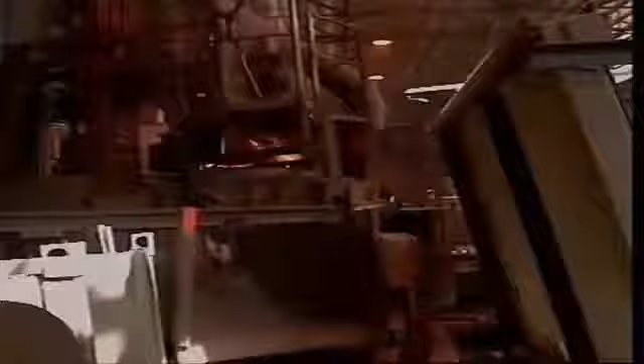An alloy is a combination of materials to make a substance that has properties different from the original materials. Aluminium by itself is too soft to stand up to the pressures a piston copes with, but if it is mixed with other materials, alloys are produced that are ideal as pistons.

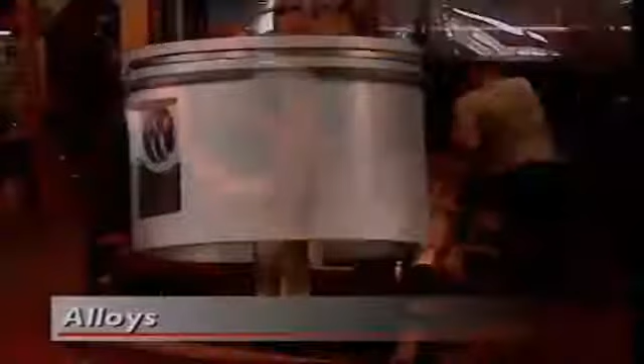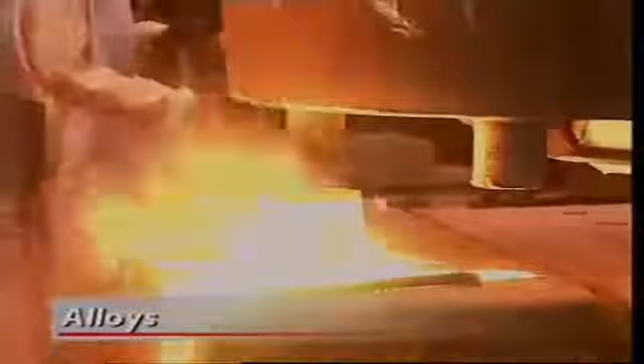In the same way, different steels can be made with a huge range of properties by changing levels of carbon in iron. Alloys can be designed with exactly the properties a particular part needs.

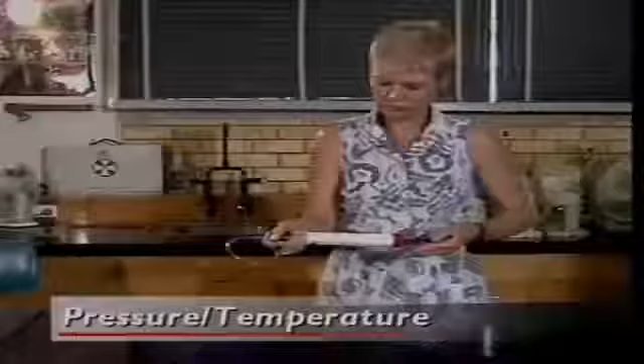The pressure and temperature of a gas are linked. As pressure goes up and down, so does temperature. This container has a fixed amount of gas. A plunger seals one end of the container. A pressure gauge is attached, and a thermometer.

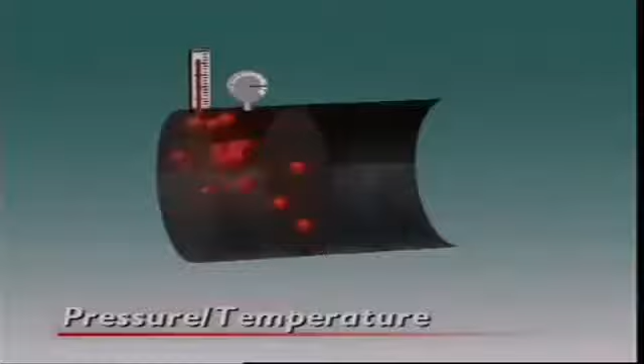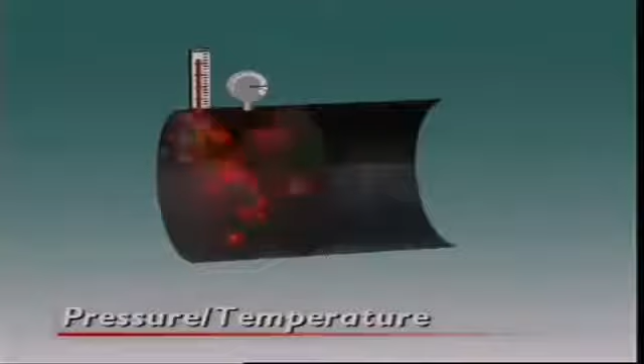Pushing in the plunger increases gas pressure. It forces the gas molecules into a smaller space. As a result, they move faster and make more impacts. This causes the gas to heat up, and the overall temperature of the gas rises too. An increase in pressure produces a rise in temperature.

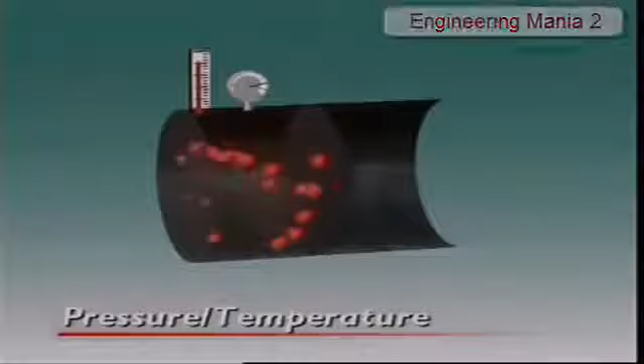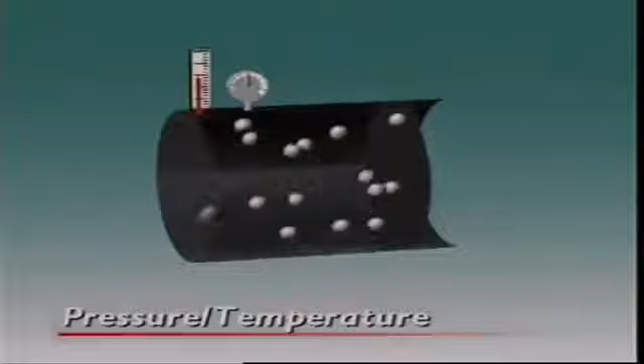Pulling out the plunger reduces gas pressure. It gives the molecules more room to move. They make fewer impacts. The energy level of the molecules falls, and so does the temperature of the gas. A fall in pressure produces a fall in temperature.

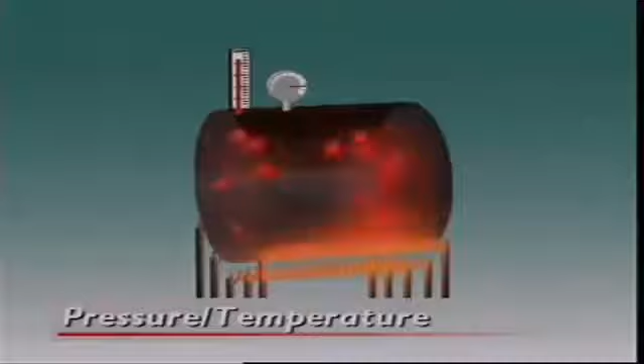Now let's see what happens when it is temperature that changes first. When a gas is heated up, its molecules gain energy and start to move more quickly. They make more impacts. This increases the pressure the gas is exerting. Increasing the gas temperature produces increased pressure.

Cooling has an opposite effect. The particles lose energy and slow down. They make fewer impacts. Pressure falls. So, for a fixed amount of gas, higher temperatures produce higher pressures, and lower temperatures produce lower pressures.

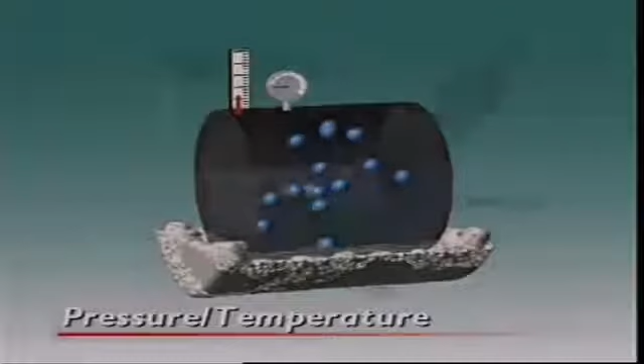This is put to use in compression ignition, or diesel, engines. Air in the combustion chamber is highly compressed by the piston. This causes such a large rise in air temperature that when fuel is sprayed into it, the mixture ignites.

The cylinder of this bicycle pump contains air. Its exit is sealed with a pressure gauge. As the plunger is pushed in, the air is forced into a smaller volume. At the same time, the pressure gauge shows an increase in pressure. It is this increase in pressure that allows the pump to do its work.

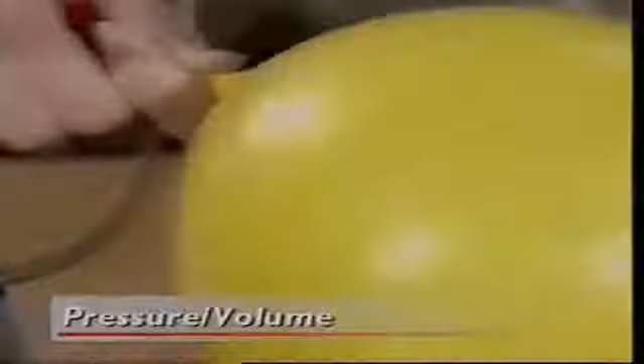When the plunger is pulled out, the volume occupied by the gas grows larger and the pressure drops. Larger volume, smaller pressure. Smaller volume, higher pressure. Pressure and volume are in what is called an inverse relation. As one rises, the other falls.

Reciprocating. Reciprocating means going back and forth over the same path. Using reciprocating action to make rotary action has many applications, large and small.

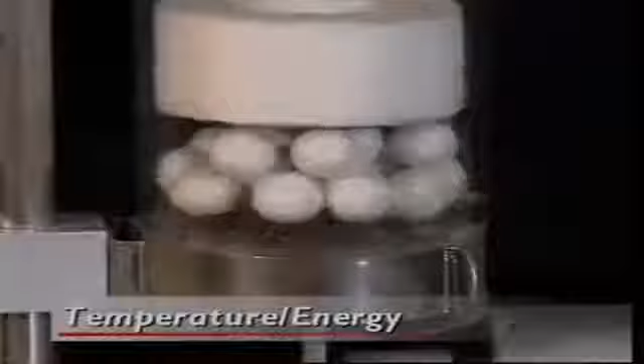The temperature of a gas is a measure of how much energy it has, and the more energy it has, the more work it can do. This is because heating gas particles makes them move faster, and they exert larger and larger pressure on the surfaces of their container. Higher pressure means the particles exert increased force, until eventually they are able to do work.

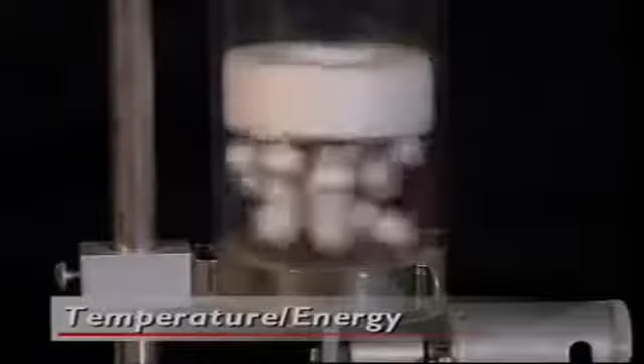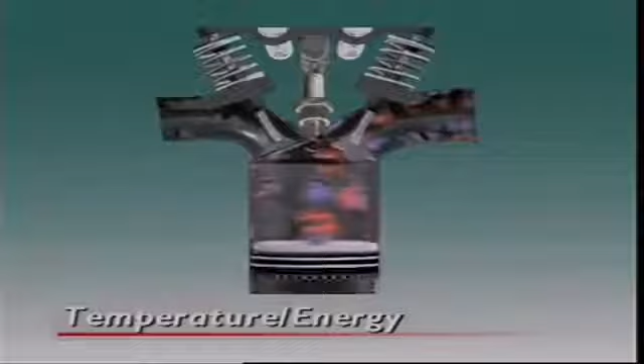This is especially true for the very high temperatures generated in combustion. The more energy the air-fuel mixture has, the more force it exerts on the piston and the more work the piston can do. That's what happens during the power stroke.

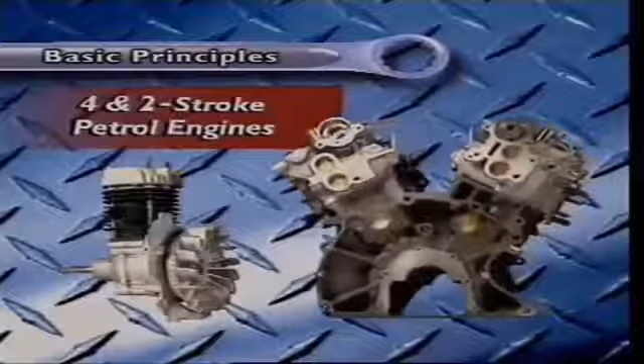Let's look at the basic principles of 4-stroke and 2-stroke petrol engines. This is a cylinder for a 4-stroke petrol engine.

The first step is to get the air-fuel mixture into the chamber. Mixture enters through an inlet port that is opened and closed by an inlet valve. This is called intake. Next is compression.

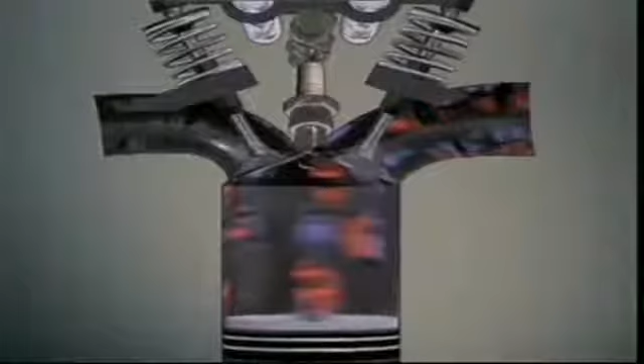The piston compresses the air-fuel mixture into a smaller volume. A spark across the electrodes of a spark plug ignites it and it burns. This burning is called combustion.

The burning gases expand rapidly and push the piston down the cylinder until it reaches bottom dead centre. The reciprocating action of the piston turns into the rotary motion of the crankshaft.

The crankshaft forces the piston back up the cylinder, pushing leftover gases out past an exhaust valve. And everything is back where it started, ready to repeat the whole process.

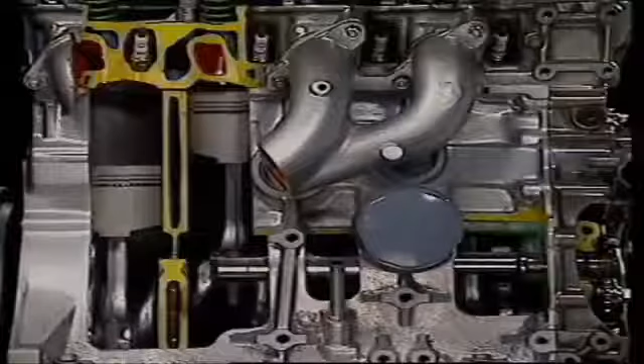The whole process is a cycle. A new mixture enters and is ignited. Combustion occurs, expanding gases drive the piston down and turn the crankshaft, which pushes the piston back up the cylinder.

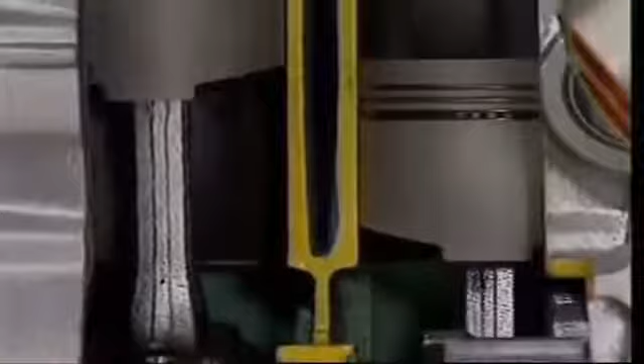These 5 events occur in all internal combustion engines. How they happen can change, but they are always there.

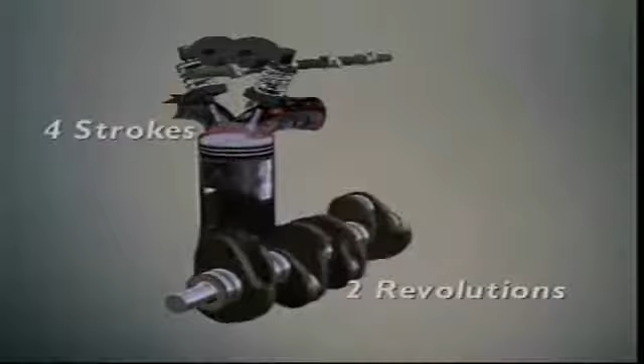In one 4-stroke cycle, the crankshaft does 2 revolutions. In those 2 revolutions, how many strokes does the piston make? It does 4 strokes. Out of those 4 strokes, how many actually produce energy? In one 4-stroke cycle, only 1 stroke out of 4 delivers new energy to turn the crankshaft.

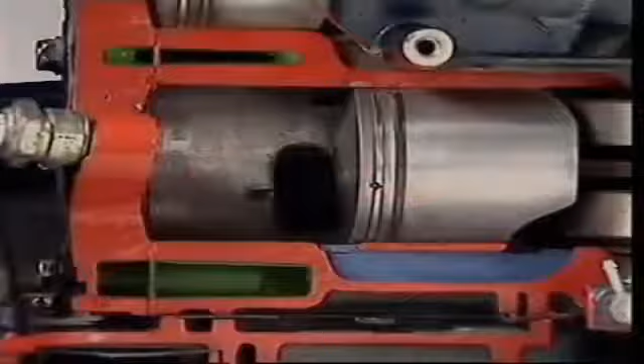Let's look at the principles of the 2-stroke petrol engine. The 2-stroke petrol engine is different from the 4-stroke petrol engine. In a 2-stroke engine, the inlet and exhaust ports are opened and closed by the movement of the piston. But it is still an internal combustion engine and has the 5 events common to all such engines.

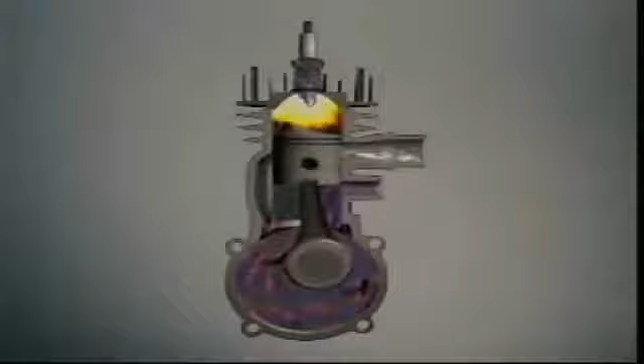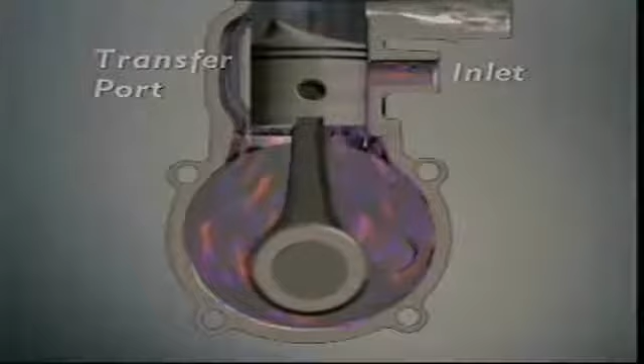Intake occurs when the air-fuel mixture enters the crankcase. It's then transferred from the crankcase to above the piston. Compression, forcing the mixture into a small volume. Ignition, when the spark from the spark plug ignites the mixture and it burns. Power, where energy released by combustion generates the force that turns the crankshaft. And exhaust, removing leftover gases.

As in all internal combustion engines, these 5 events must occur, but not always in the same way. The whole process is a cycle. A new mixture enters and is ignited. Combustion occurs. Expanding gases drive the piston down and turn the crankshaft, which pushes the piston back up the cylinder.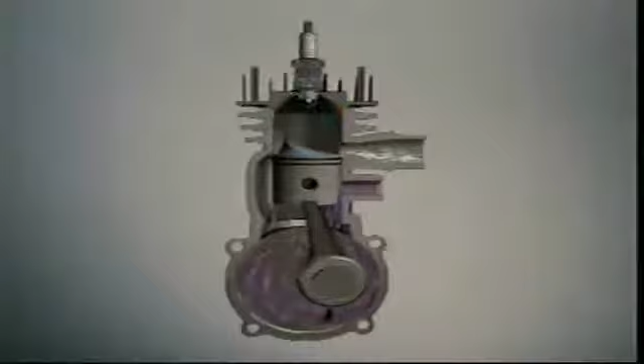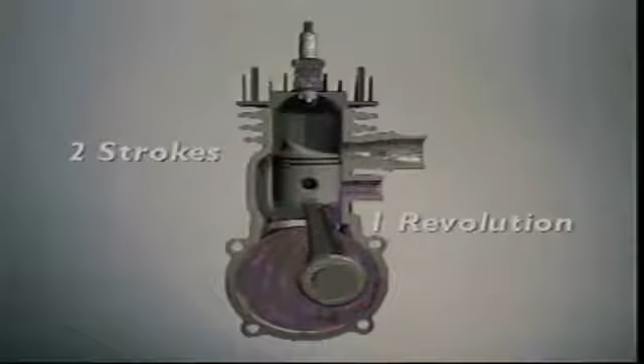In one 2-stroke cycle, the crankshaft does 1 revolution. In that 1 revolution, how many strokes does the piston do? 2 strokes. Out of those 2 strokes, how many actually produce power? In a 2-stroke cycle, only 1 stroke delivers energy to the crankshaft.

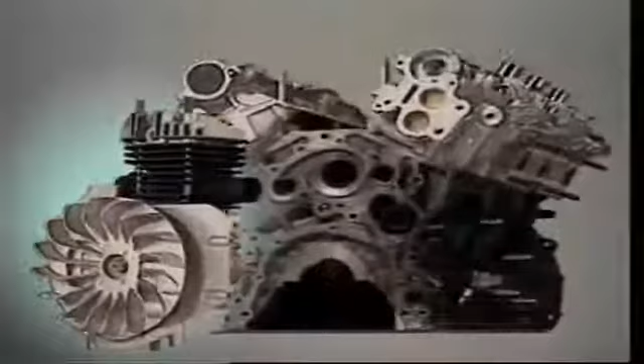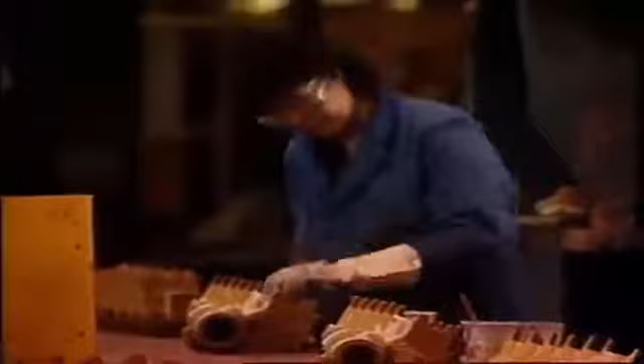This section looks at major components of the 4-stroke and 2-stroke petrol engine. Because they operate on similar principles, many of their components are similar too. For example, their engine blocks both operate under working conditions of very high pressures and temperatures. And new designs and materials to make them work more efficiently are always being tested.

Many vehicles still use cast iron, but some have aluminium alloy blocks. The main gain is a saving in weight. Aluminium alloys can be made as strong as cast iron, but they're lighter. This is also true for cylinder heads.

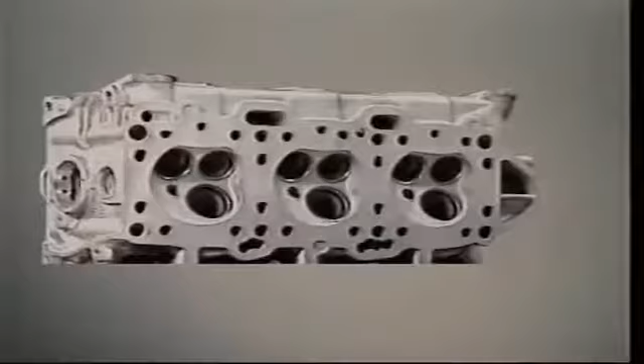Combustion chambers in the cylinder head come in many different designs. To help hold in the extreme heat and pressure of combustion, a seal is made between the block and cylinder head by a head gasket. The four-stroke petrol engine has other passages cast into the head to carry oil for lubrication and coolant for cooling.

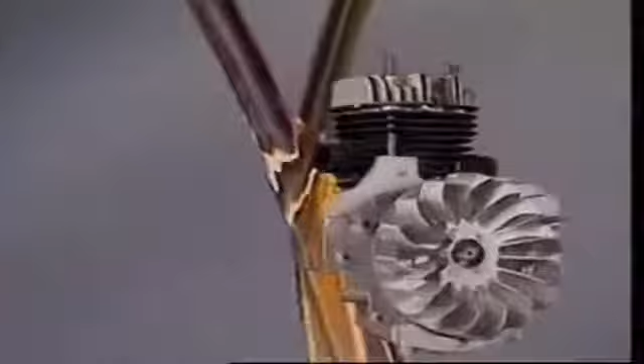In a two-stroke petrol engine, lubrication occurs by mixing oil with the petrol, so oil passages are not needed. And if, like many two-strokes, air cooling is used instead of liquid cooling, there's no need for coolant passages in the cylinder head.

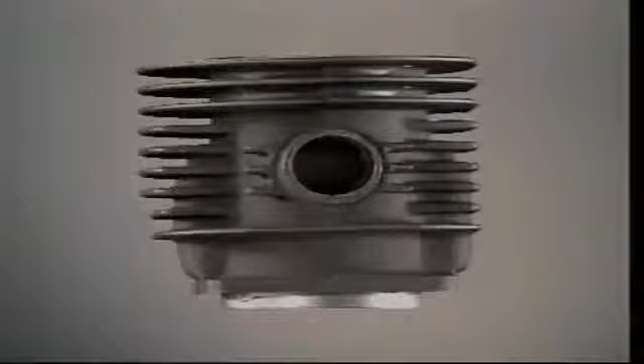Another difference between four-stroke and two-stroke petrol engines is how they deliver air-fuel mixture to the cylinder. In a two-stroke petrol engine, separate passages called ports let air-fuel mixture into the crankcase and cylinder and exhaust gases out. They're covered and uncovered by the piston as it moves up and down the cylinder.

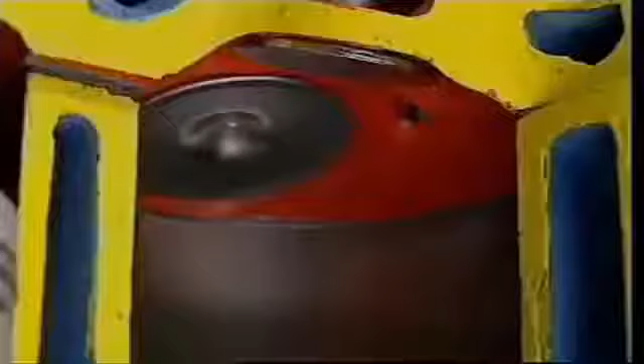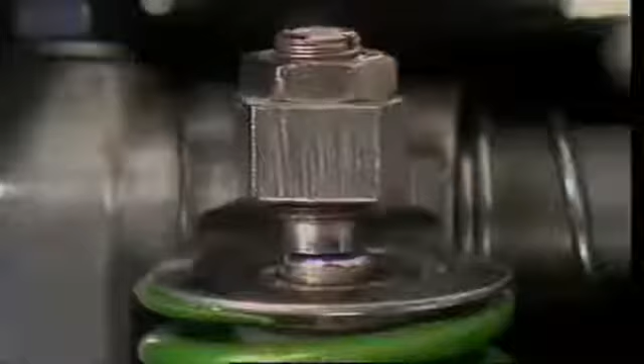In the four-stroke petrol engine, the inlet and exhaust ports are opened and closed by valves. These valves need a system to control how they work. The valve is held in place by a valve guide with a spring on its stem. A rocker arm is attached to a stationary shaft that allows the arm to pivot. The rocker arm compresses and releases the valve spring so that the valve opens and closes.

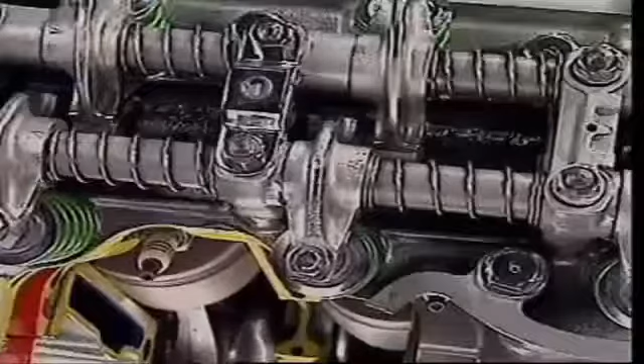The valves need a system to control how they work. This is done by using cams. A cam is a lobe on a shaft, specially shaped to open the valve, hold it open and let it close.

The cams control the valve action, but what drives the cams? Cams are attached to a camshaft. In modern vehicles, it's usually mounted over the cylinder head and is called an overhead camshaft.

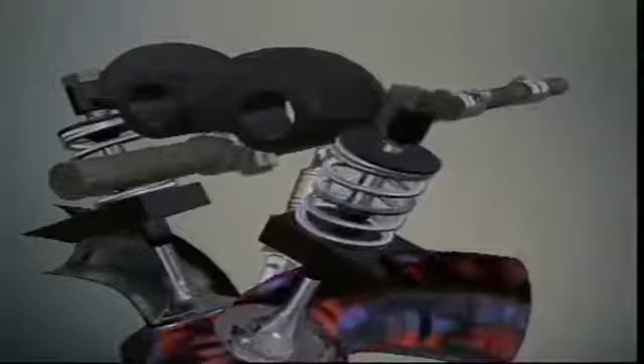Intake and exhaust lobes can be on the same shaft, or there can be a shaft each for intake and exhaust. Notice that in this design there's no need for rocker arms - it's a much simpler arrangement.

A camshaft can also be mounted in the engine block near the crankshaft. As the camshaft rotates, motion is transferred through the pushrod to the rocker arm. It pivots and opens the valve.

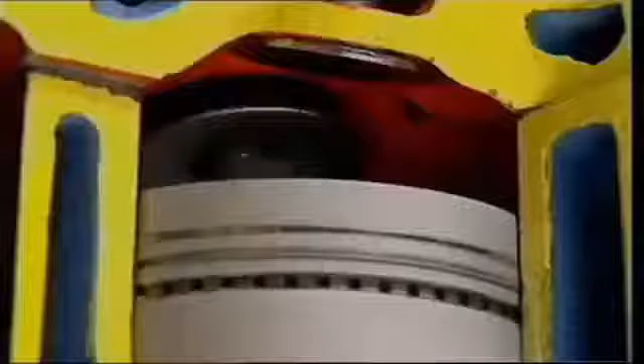The camshaft keeps all of the valves working in sequence, but all of this still must always happen at the right time. Air-fuel mixture must enter at the right time in the cycle, and the piston must be in the right place when the exhaust valve opens. The position of the piston is crucial, but what determines that?

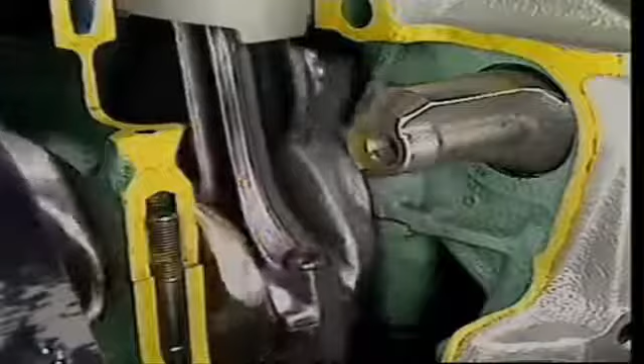The crankshaft helps to synchronize all this activity. In one cycle of a four-stroke engine, from intake through compression, ignition, power and exhaust, how many times does the crankshaft turn? Twice - it makes 2 revolutions.

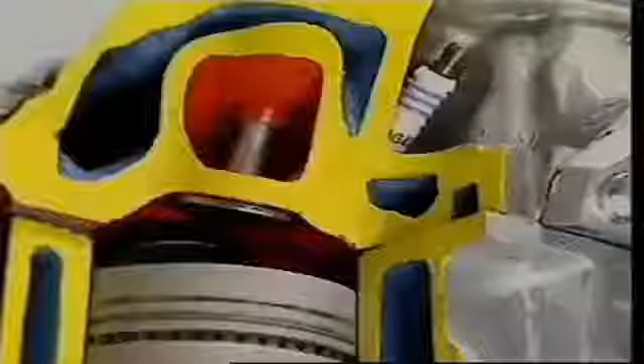During that time, what happens to the valves? They open and close once. So the cams must turn through just 1 revolution, as does the camshaft. In each cycle, the crankshaft turns twice and the camshaft only once, so the camshaft must turn at half the speed of the crankshaft.

One way to do this is with gears. One of these gears has 40 teeth and the other, the driving gear, has 20. When they mesh, the larger one rotates at half the speed of the smaller.

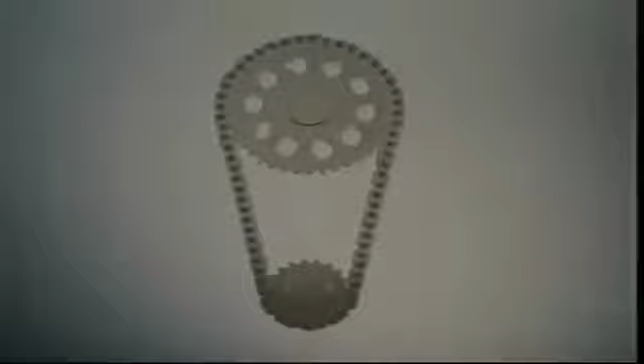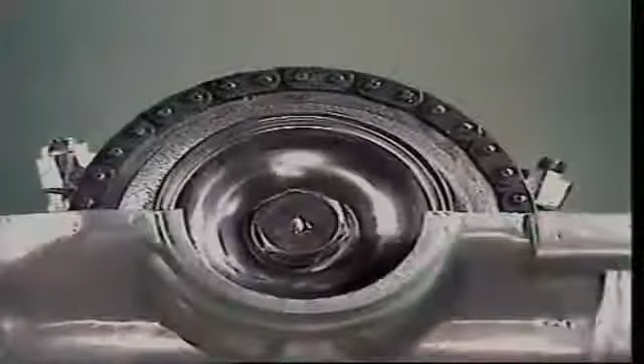If these gears are separated but linked with a chain, it makes them turn in the same direction, but they still turn at their same speeds. If the smaller gear is on the crankshaft and the other is on the camshaft, how fast does the camshaft turn compared with the crankshaft? Half the speed - just what the system needs.

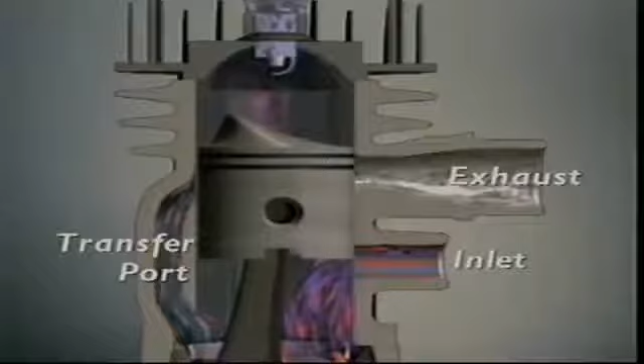The position of the ports is important for how mixture enters the cylinder and for how burned gases leave it. Removing exhaust gases is called scavenging. If they aren't fully removed, it reduces engine efficiency. Some engines use a deflector on the piston crown. It directs air-fuel mixture up towards the spark plug and exhaust gases down towards the exhaust port. This reduces the amount of incoming mixture escaping through the exhaust port and helps remove exhaust gases.

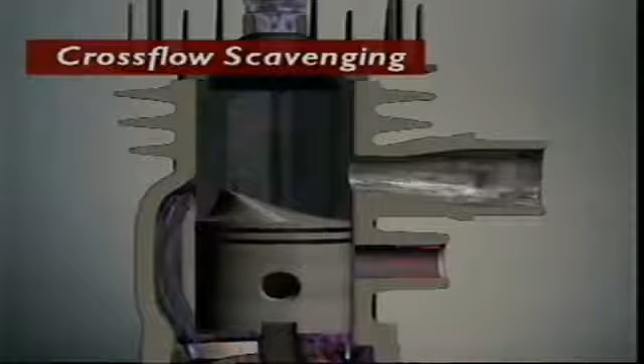How scavenging occurs depends on the design of the cylinder and ports. Crossflow scavenging occurs when mixture enters on one side of the cylinder and exhaust gases escape on the other side. No valves are used and mixture flows across the cylinder. Loop scavenging means mixture enters the cylinder across the top of the piston and is caused to flow upwards in a loop before moving in the direction of the exhaust port.

Let's look at the 4-stroke and 2-stroke petrol engine cycle. What is a stroke? It's the movement of the piston from top dead centre to bottom dead centre. Calling an engine 4-stroke means its engine cycle has 4 strokes. A 4-stroke petrol engine uses internal combustion, so those 4 strokes must include the 5 key events common to all internal combustion engines: intake, compression, ignition, power and exhaust.

Let's look at a simplified model. The intake stroke starts with the exhaust valve closed, the inlet valve opening and the piston at its highest point, top dead centre. It starts to move down, increasing the volume above the top of the piston. This makes pressure inside the cylinder lower than pressure outside. This higher outside air pressure forces air-fuel mixture into the cylinder. The piston reaches bottom dead centre, the inlet valve closes and the intake stroke ends.

Both valves stay closed as the piston leaves bottom dead centre. The piston moves up, squeezing the air-fuel mixture into a smaller and smaller volume, which compresses it. That makes its temperature rise, and that makes combustion easier.

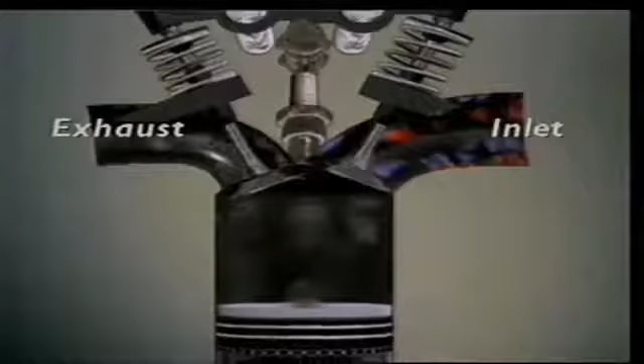Just before the piston reaches top dead centre, the next key event occurs: ignition. Burning, expanding gas generates the force to push down the piston. This is the power stroke that drives the engine. The piston now moves from bottom dead centre to top dead centre. The exhaust valve opens and the piston pushes out the leftover gases.

Let's look at the cycle operating. Intake takes in air-fuel mixture. Compression squeezes the air-fuel mixture into a smaller and smaller volume. Ignition: the mixture under pressure is burned. Power: burning, expanding gases push the piston down, creating a power stroke that turns the crankshaft. Exhaust: the piston moves upward, forcing burned gases from the chamber. All 5 events occur in this order in each of the engine cylinders.

Let's look at the cycle of the 2-stroke petrol engine. Calling an engine 2-stroke means its engine cycle has 2 strokes. As in a 4-stroke engine, a stroke is the distance from top dead centre to bottom dead centre.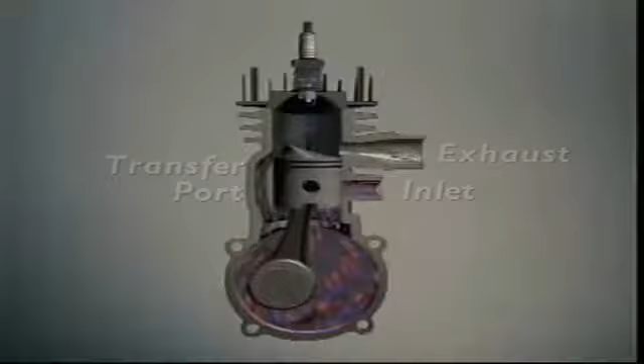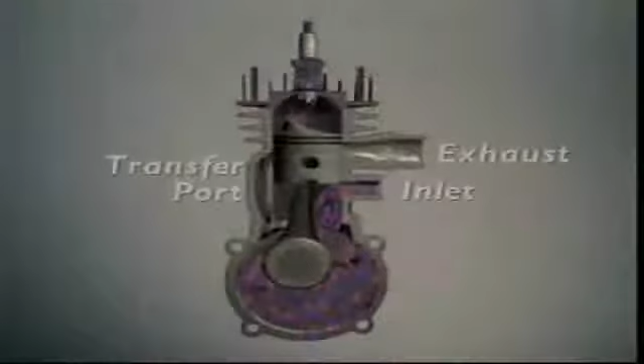The piston moves up the cylinder from its lowest point, bottom dead centre, compressing air-fuel mixture already in the combustion chamber. As it rises, the top of the piston covers the exhaust port and the transfer port. This is a third port or passage between crankcase and cylinder. The bottom of the piston uncovers the inlet port. At the same time, the rising piston is increasing the volume of the crankcase below the piston. Pressure in there falls until it's less than outside air pressure. This pressure difference forces more mixture into the crankcase.

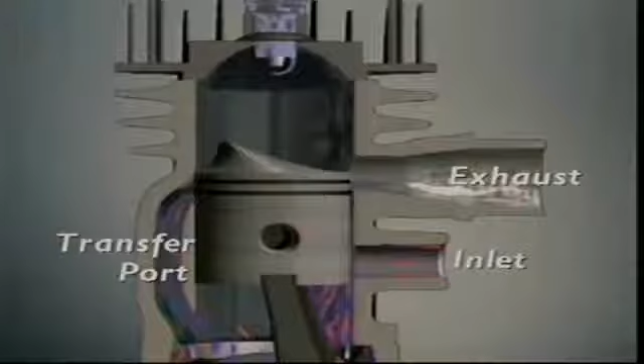As the piston reaches top dead centre, mixture already there ignites, and expansion of gases starts to drive the piston downward. The piston moves down. The bottom of the piston covers the inlet port as the top of the piston uncovers the exhaust port. Opening the exhaust port starts the scavenging process. It releases the pressure above the piston and burned gases escape.

At the same time, closing the inlet port means the descending piston is compressing the air-fuel mixture in the crankcase. The top of the piston uncovers the transfer port. Increased pressure in the crankcase forces fresh air-fuel mixture up through the transfer port into the cylinder, replacing the burned gases, and the cycle starts again.

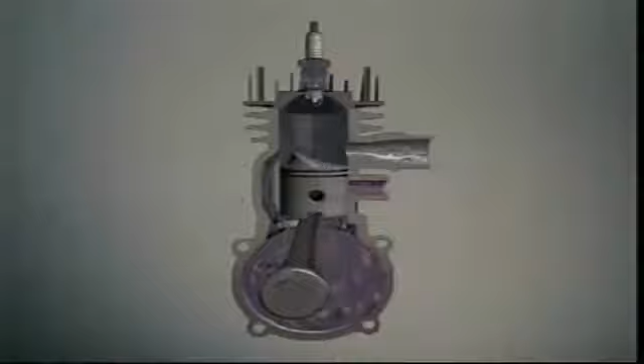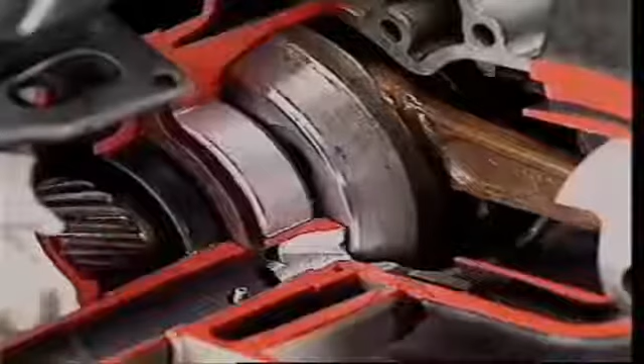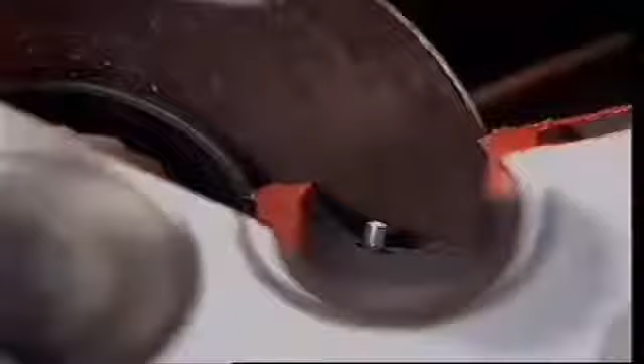This intake system is called a piston port system because the piston acts as a valve to cover and uncover the ports. This intake system uses a rotary valve. The crankcase has a hole open to the crankcase chamber and a rotary valve cover attached to the carburetor. The rotary valve is mounted on the crankshaft between the crankcase and the valve cover. As the crankshaft turns, the rotary valve rotates with it, opening and closing the inlet port as it does so.

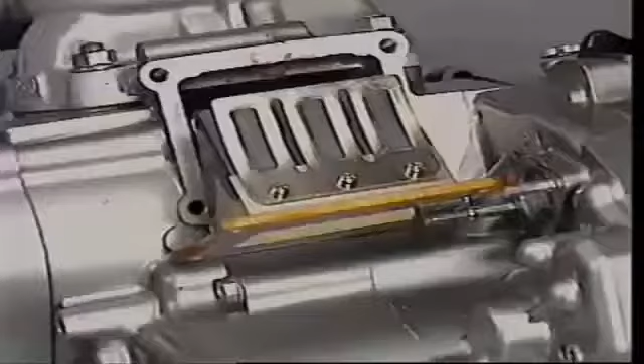Some two-stroke engines, such as outboard motors, use an intake system with a reed valve. It's a small, flexible metal plate that covers the inlet port, and it can be attached to the crankcase or to the inlet port. It opens and closes automatically, according to changes in pressure in the crankcase.

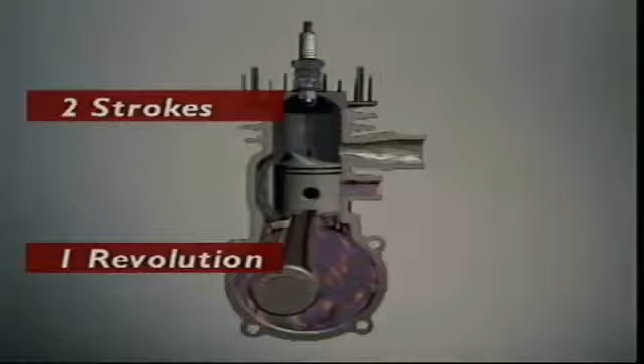The two-stroke engine makes only 2 strokes, one up and one down for each time it fires. That's only 1 revolution of the crankshaft for each cycle. Compare this with a 4-stroke that needs 2 revolutions of the crankshaft for each engine cycle, and only 1 power stroke for each 4 engine strokes.

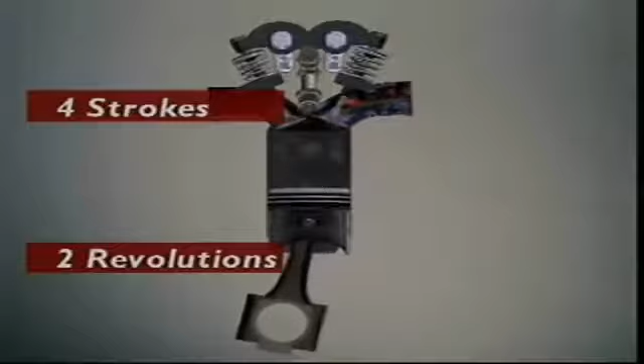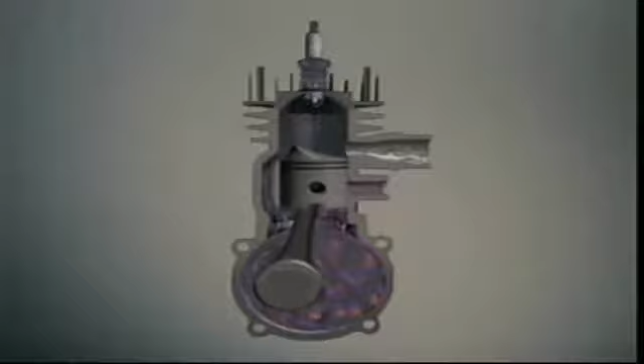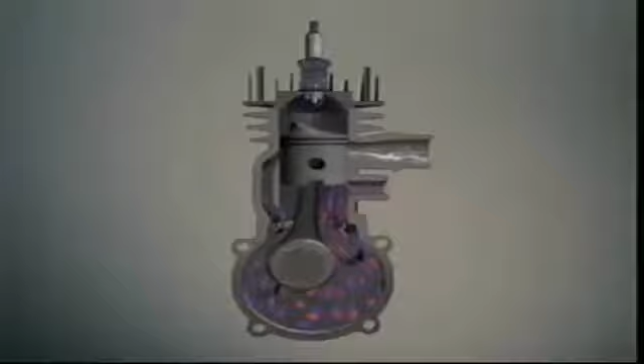Let's run the cycle again. The piston moves up the cylinder. The top of the piston covers the exhaust port, the bottom uncovers the inlet port. Air-fuel mixture enters and circulates in the sealed crankcase below the piston. The piston rises and compresses the mixture above it. A spark plug ignites it and it burns.

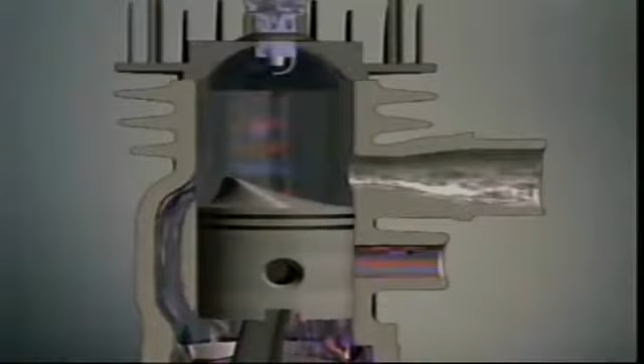Pressure from the expanding gases pushes the piston down in a power stroke. The top of the piston uncovers the exhaust port and lets exhaust gases escape. The bottom of the piston covers the inlet port and forces air-fuel mixture up into the now open transfer port. The piston reaches bottom dead center and the crankshaft forces it back up to repeat the process.

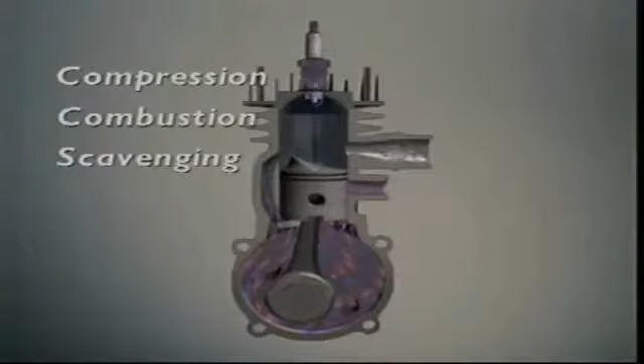Notice which events occur above the piston: compression of the air-fuel mixture into the combustion chamber, combustion for the power stroke, and scavenging of the exhaust gases. Notice the events that occur below the piston: intake into the crankcase, pre-compression of the air-fuel mixture in the crankcase, and the transfer of mixture from the crankcase through the transfer port and into the combustion chamber.